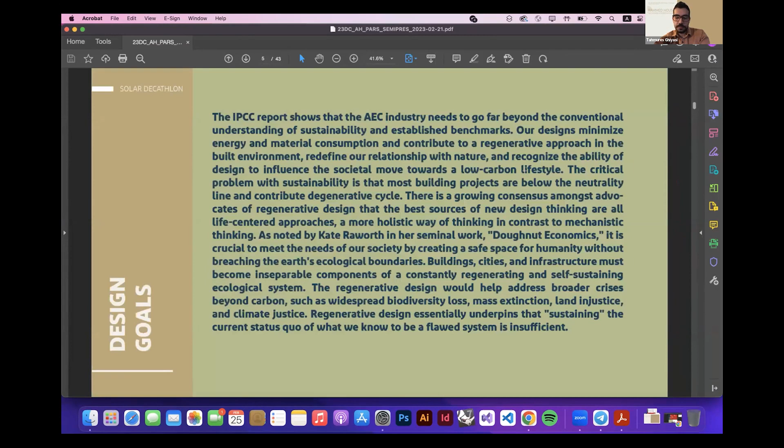The site of the project is in Sistan and Balochistan province in Iran, which I want to share something about with you. This province is the most economically depressed part of Iran, and a detached house within the framework of the governmental social housing called Maskan Mehr is being designed and constructed there. It is important to know the gas grid and electrical grid are limited, and regarding this special situation in this province in Iran, there is some kind of instability in these energy resources.

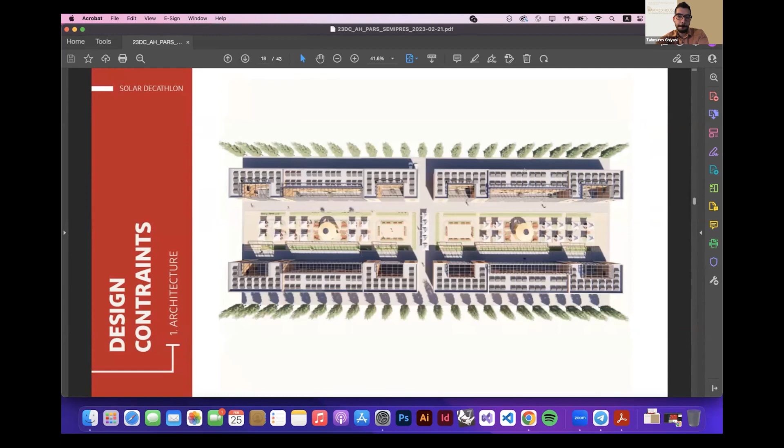Okay, I want to provide some information about the architectural aspects also. I'm sorry, can you see the plans and sections? Okay great. Well, it's important to mention that, as I previously mentioned, we designed two different types of units: one of them is about 1,400 square feet, and the second one is 2,100 square feet. We also designed some semi-private spaces between units.

With the R values, which I'm going to mention: the R value for wall is 32, for roofs is 40, the foundation 40, and also for windows is 4.

Regarding the engineering part of the project, as I mentioned before, the energy instability is a real trouble for residents of this province. In the city of Zahedan, people are using diesel generators and similar approaches to provide their energy. So after analysis and calculations, we found that we can provide the needed energy just by using photovoltaic cells on the roofs, with the main heating and cooling systems being air source heat pumps, which are reversible.

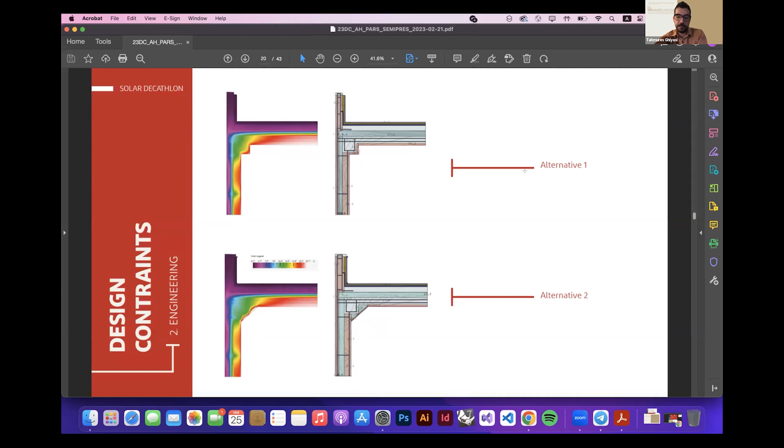You can see some details of the wall sections we designed for this particular state in Iran. The other important fact is about the marketing of the project. Our design buildings will cost 10 to 15 US dollars per square foot. That has a really important difference from the status quo of similar projects' cost, which is about 65 US dollars per square foot now.

So although the PV cells and HVAC systems are more than 30% of the total cost, the final result provides absolutely meaningful benefits for constructors and the people who are going to be residents in this new design.

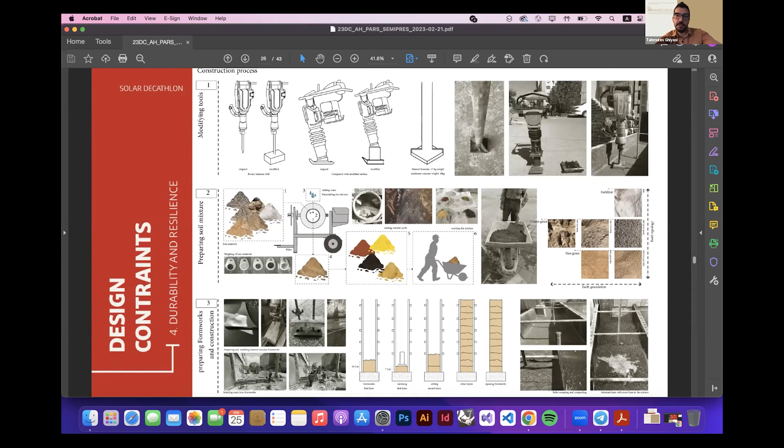About durability and resilience, we use low carbon envelopes and sustainable, local materials, which provide a really sustainable approach. There's also potential for maintenance regarding the construction details and systems we propose for the whole project. Regarding embodied carbon, we tried to reduce it as much as we could, and the final result is 0.25 tons of carbon dioxide per square foot, which was, as I previously mentioned, a meaningful result for us.

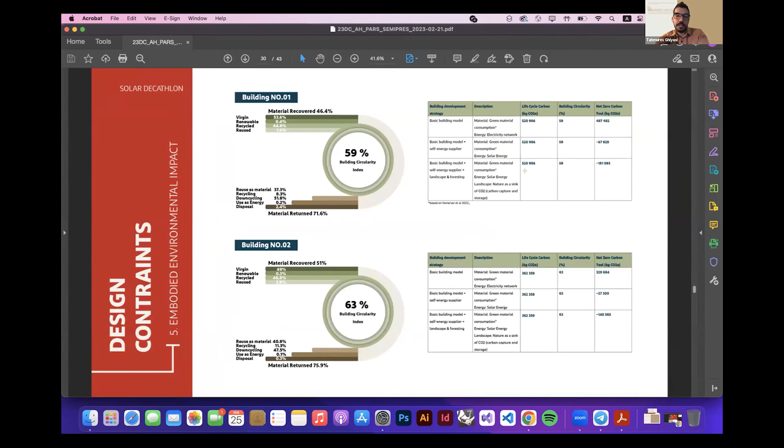Regarding the integrated performance of the whole design, I want to mention the regenerative design which we used; we wanted to consider the system as a whole, and the cost was one of the important targets for us.

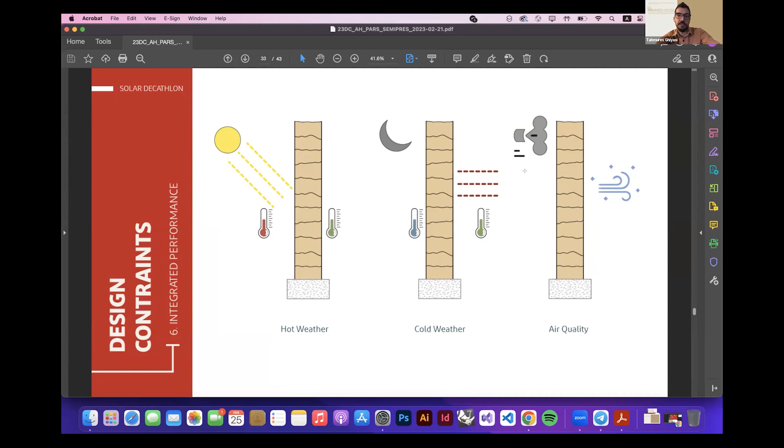Although the regenerative design and circular economy is the trend, we're considering the doughnut economy model because Iran is a developing country and there are so many troubles in social housing foundations. It's not so easy to dedicate every other aspect of the design to ecological contributions. Instead, we had to make a trade-off between these objectives, like a multi-objective optimization design space or model, if you're familiar with it.

Regarding the occupant experience, I want to mention two important points. We design an architecture to provide visual and thermal comfort, and also acoustical comfort requirements will be met by designing private and semi-private spaces, like the yards in the outdoor spaces of the project. About comfort and environmental quality, we try to design an architecture that meets the needs of the people to have a quality life with the approach of reducing costs.

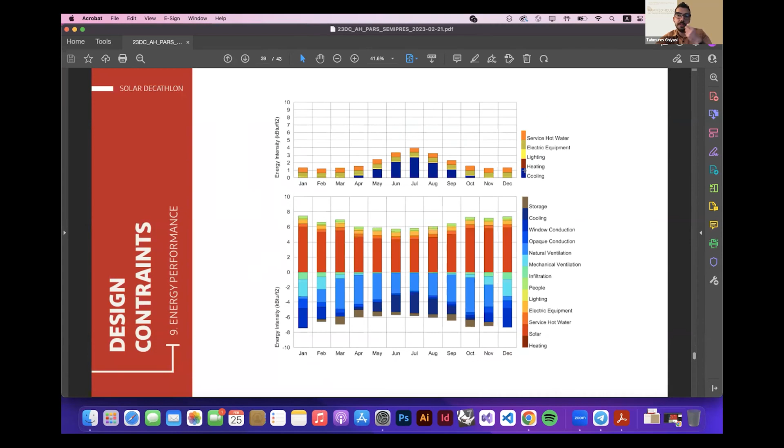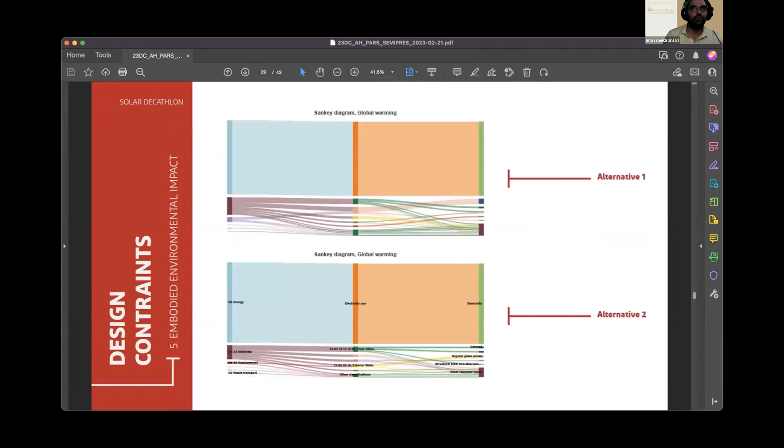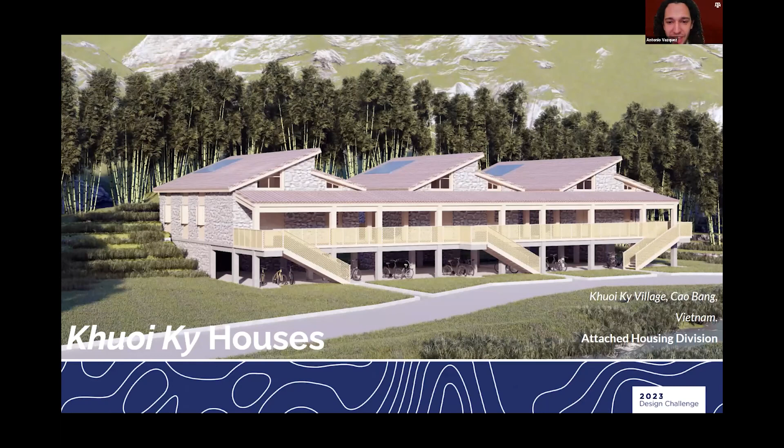We have a multidisciplinary team of architecture and construction science students from both universities and faculty advisors from both. These are our industry and design partners. I would like to highlight that we collaborated with the Ministry of Construction of Vietnam and 1+1 greater than 2, which is a Vietnamese design and construction firm.

This project is located in Khuoi Ky Village within the Cao Bang region of northern Vietnam. It consists of 3 attached houses. Our objective with this project is to propose a sensible intervention that addresses existing problems related to access to energy, living conditions, lifestyle, and the economy.

Khuoi Ky Village is inhabited by members of the Tay ethnic group, and 14 multi-generational families make up its whole population. It's located in a mountainous region, 951 feet above sea level. They have an agricultural and livestock-based economy, although due to the proximity to the Ban Gioc waterfalls, there's a growing tourist homestay market in the village.

The team had the opportunity to visit the village and survey a neighboring house. Indoor illuminance, temperature, and air velocity were measured to assess the indoor environmental quality. We found that the locals generally live in poorly ventilated spaces, dark interiors, and cold interior environments. This analysis of their existing conditions helped us define our design goals.

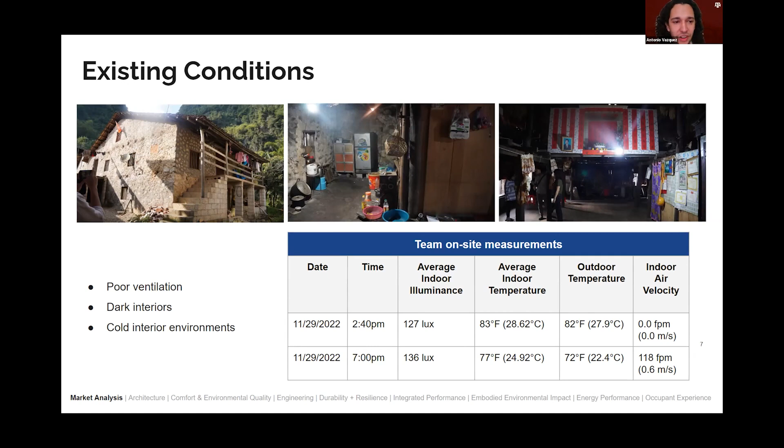Our project is in a region characterized as having a temperate climate with a dry winter season and a hot summer season at latitude 22. A more detailed analysis of the climate utilizing a local weather data file confirmed the temperate nature of the climate and its predominant cold and hot seasons.

Furthermore, a natural ventilation potential analysis was conducted. In this location, there are prevailing winds from the south during the hot season, which is when natural ventilation will be more desirable.

Using a modified comfort range for the Vietnamese people, we concluded that passive design strategies such as internal heat gains and natural ventilation could provide thermal comfort during 80% of the year and only require supplementary heating and cooling during 20% of the year, ensuring the lowest possible reliance on energy consumption.

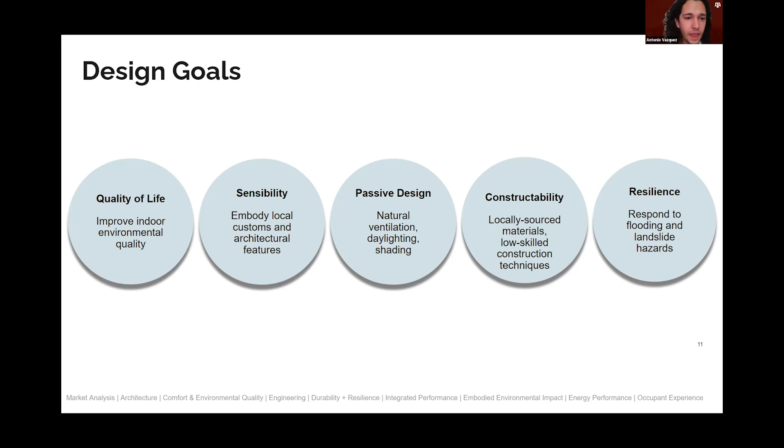Our design addresses 5 goals: quality of life by improving indoor environmental quality; sensibility, as the project respects and embodies local customs and architectural features; passive design strategies such as natural ventilation, daylighting, and shading to ensure comfort and low energy consumption; constructability, studied to prioritize locally sourced materials and low-skilled construction techniques; and finally, resilience towards flooding and landslide hazards.

The attached houses are joined by an outdoor veranda oriented towards the southeast, in part to respond to local building customs, but also to provide access to the prevailing summer winds and views towards the landscape. The buildings were separated to facilitate natural ventilation and access to daylighting, and harvest drying areas are provided in the gaps between the buildings.

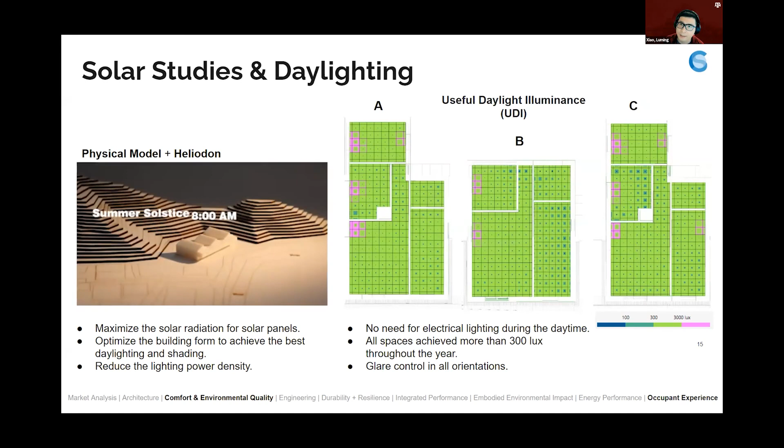For the solar studies, we maximize the solar access for photovoltaics and daylighting, and optimize the shading design. The right diagram shows we have very good daylight performance, with every space exceeding 300 lux at least during the daytime, and we control the glare effect very well in all directions.

For the envelope, we were using local materials with good performance and easy access in that region. We selected a continuous insulation system with low carbon and low-skill construction techniques that local people can build easily.

The selection of energy-efficient building materials was based on reduction of embodied carbon by using local materials to reduce transportation-related emissions. At the same time, the use of local biogenic materials can store carbon to offset operational carbon emissions.

To address the flooding and landslide hazards, we adopted local bamboo for protecting buildings, which can stabilize the soil at the back of our site. At the same time, we elevated the building to avoid floods. We also designed a rainwater harvesting system to collect and store water for irrigation and domestic use.

We used EUI and HERS to evaluate the energy performance. Before solar panels, we achieved 4.3 to 4.5 EUI for each unit, and with solar panels we got 0. In HERS, we got 34 to 36 without solar panels and 4 to 8 with solar panels. Our design exceeds the AIA 2030 challenge requirements and is more efficient than the RESNET reference home.

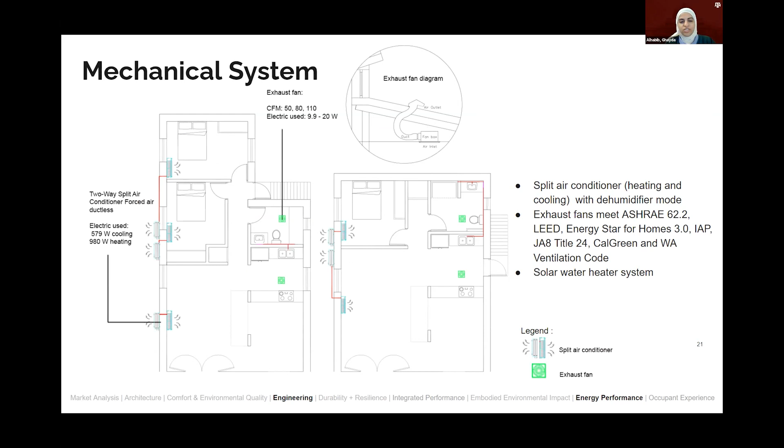To sum up, our project improves existing living conditions for the occupants, reduces energy consumption through the use of passive strategies, incorporates local architectural features and lifestyles, uses locally sourced material and low-skill construction technique, responds to natural hazards, and proposes an adaptable and affordable housing prototype for future development in that region. Thank you.

Great job, guys. Yeah, really well done. And with that, we'll turn it over to Alex and Steve.

Good morning, guys, that was an excellent job. I do have a question for you. If you go back to your overhead picture of the site, I think it was like the second or third slide that you had there. Currently it looks like the site is wooded.

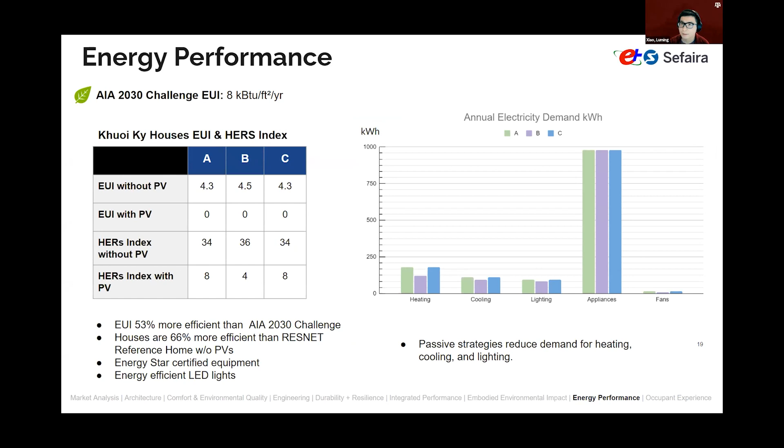You mean the utility fee? No, the sewer. I saw that there, the toilets and all that. Is it going to a city or local municipality treatment, or is it treated on site?

Our project is located in a rural area, so we have not a very good civic sewer system. Our idea is to keep the contour of the existing condition. On the back of the site we have a mountain, and we're trying not to change too much elevation on our site. Then we can still navigate the rainwater to the lowest point, to the river in front of our site. This is a consideration, but if the local area has a good civic drainage system, we will connect to that as well. We're also considering using a septic tank, basically.

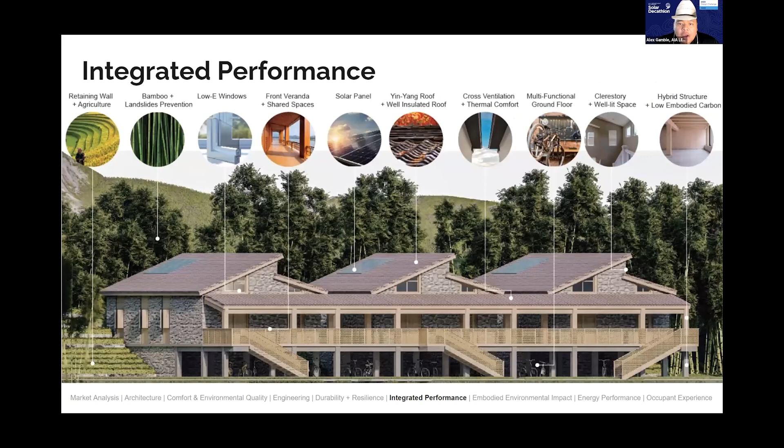Okay, I didn't see anything that reflected that. I understand the stormwater, but again, black water, right? That's got to be important here. Second question: I know it said it was an agricultural and livestock economy. Other than the harvest drying area, how does this design take into account the people's use and reliance on livestock? How does the design address that, and I don't know what kind of livestock they're raising or maintaining, but how does it address that? And going back to that, where there are animals, there's waste. How does that happen?

Part of our design embodies local architectural features. Here, all the houses are elevated, and their first floor functions as storage space, where they keep livestock on the first level. That's also part of elevating the houses, so that first floor seems to be very important to them for that use.

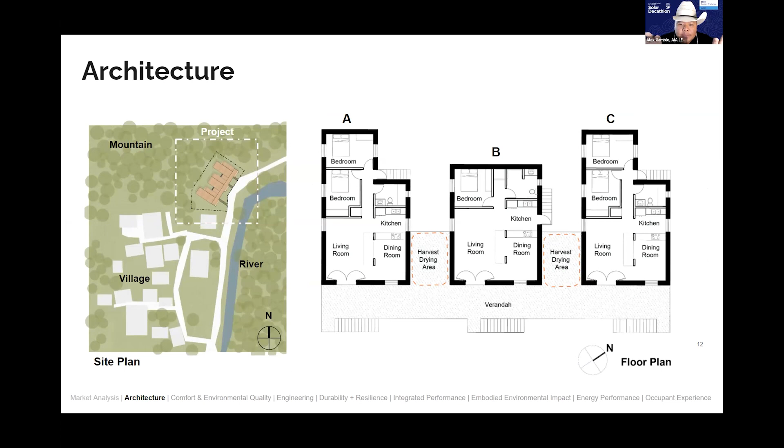Okay, yeah, that makes sense. In one of the sections I saw it looked like there was bicycle storage or things like that happening. Yes, on the ground floor, to avoid the flooding issue, we elevate the main living space to the second floor. At the same time, the ground floor becomes multifunctional for future use, decided by the future occupant, so it can be storage for agricultural products or a parking space.

Okay, one last question. Those little channels there, are those the stormwater channels?

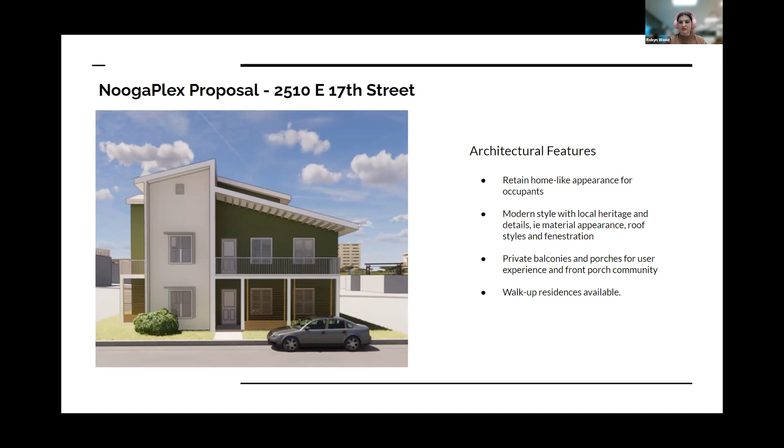The building from a glance looks like a single-family home. Each unit features its own porch to tie in the idea of a front porch community, while a modern double-shed roof combines with a traditional gable to blend in with the housing styles in the area.

Considering our target market is families with children, 2-bedroom units are a key part of the space planning and design. NoogaPlex has a 2-bedroom unit option and a 1-bedroom/studio unit to serve the majority of CNE clients, which fall in the range of 18 to 25 years old.

Chattanooga is located in the International Energy Conservation Code Climate Zone 4A. We have a warm, humid climate with our lowest temperatures dropping 0 to 5 degrees Fahrenheit. Our average hottest temperature of the year is around 89 degrees.

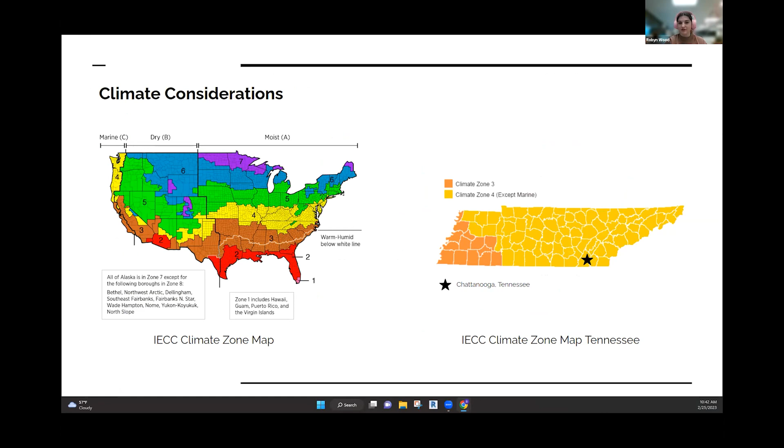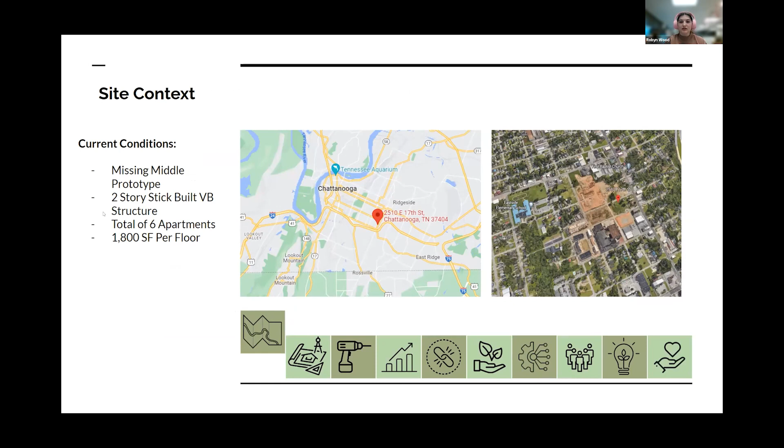Chattanooga has high humidity levels where our cloud coverage varies largely based on season. In terms of solar energy, our brightest months are from April to September, with our darker period lasting from November to February. Situated on the southeast side of Chattanooga, adjacent to I-24, the site lies facing northeast.

Chattanooga has been a rapidly growing city in recent years, which has led to the housing market rapidly increasing alongside it. Our job market lies largely in the technology, healthcare, and education industries. Our site is located near many amenities, including schools, hospitals, restaurants, and more, which maximizes access to public transportation and the walkability of the site.

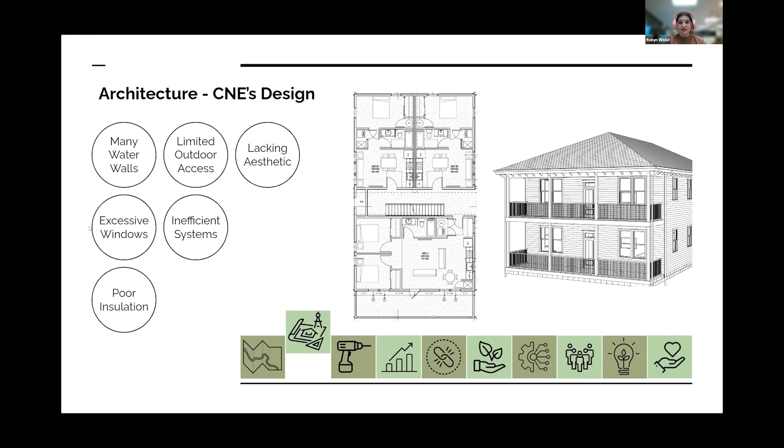Breaking down CNE's current design, we can analyze multiple design issues that can be altered to improve the building's energy efficiency. This entails poor placement of water walls, limited outdoor access for occupants, basic architectural aesthetic, excessive use of windows, inefficient systems, and poor insulation.

The architectural response for the new building retains the overall form by sharing a single roof with a breezeway and stairway through the center. The roof design has been changed from a hip roof to a mixture of attached sheds and gable, which provides more visual interest at the request of CNE, melding traditional lines with modern design. The building makes use of natural site conditions, which affect window placement, fenestration, and overall aesthetics of the building.

CNE's design was rather basic from an engineering standpoint. Though the construction was simple, it failed to adequately account for air leakage. It also sacrificed a lot of space to an unused attic and had complicated HVAC and plumbing networks.

To reduce air leakage and improve R values, we utilized expansion foam insulation. We simplified the plumbing and HVAC systems by changing to a ductless mini split and running most of the refrigerant lines and all of the plumbing through a central wall.

To take advantage of the attic space, we added an extra room on one side and hid the water and heating ventilation equipment in an easily accessible mechanical room on the other. Having this equipment separated from the resident means that it is quieter and can be accessed for maintenance without having to enter the tenant's home.

Running the ERV through the attic also allowed us to ventilate the attic and cut out expensive ducting runs.

Overall, in Chattanooga, a total of 43% of the population is cost burdened, with a median rent of $850 for renters and an annual household income below $40,000. The proposed design for the NoogaPlex can offer alternative housing options for those who pay more than 30% of their monthly income on housing.

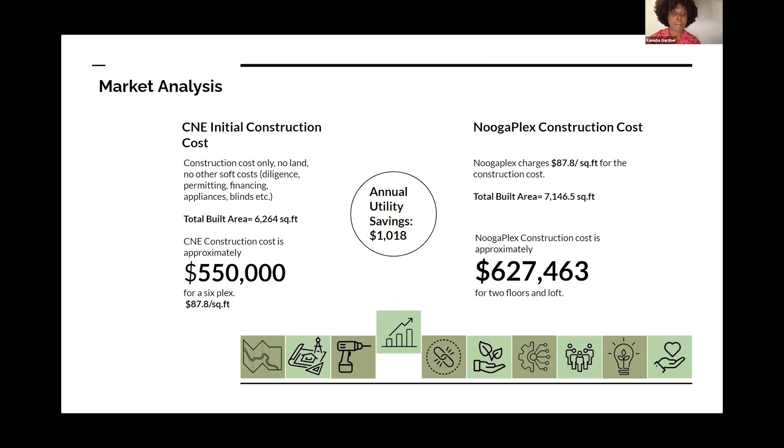This is counteracted through overall utility savings, which equals $1,018 annually. A large part of our plan focused on ensuring a long lifespan and low maintenance requirements. For the structure, this meant using materials that are strong, environmentally resistant, and eco-friendly, such as pulverized fuel ash concrete for the foundation and reclaimed wood for the framing.

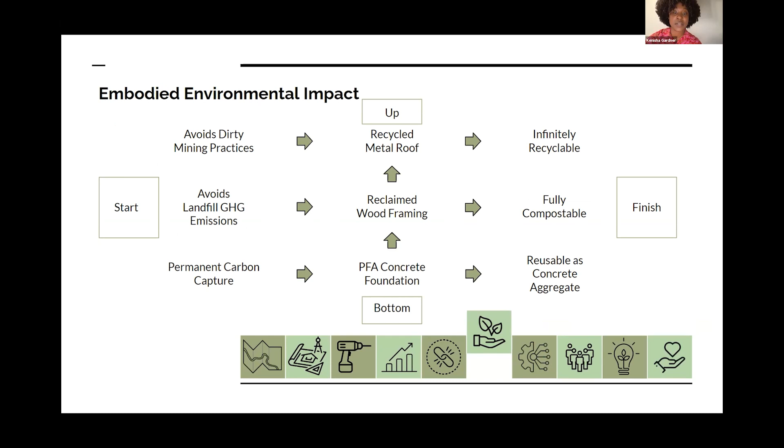For the appliances, it meant ensuring ease of maintenance and a minimum 20-year lifespan where possible. Our plan is to use a zero carbon structural design method by reducing the environmental impact of upfront carbon emissions from materials. Building materials are proportionally categorized as being recycled, reused, and diverted from landfill during construction and at the end of the building's life cycle wherever possible.

All of the electrical and HVAC systems were chosen to complement and benefit each other. To reduce electricity demand, we incorporated energy recuperation strategies such as an ERV and a waste heat concentrator, which captures heat from the AC system to preheat water for the tankless water heaters. Additionally, we chose efficient appliances and utilized passive cooling strategies wherever possible, which improved overall air quality and reduced the number of air changes per hour required to maintain a healthy environment.

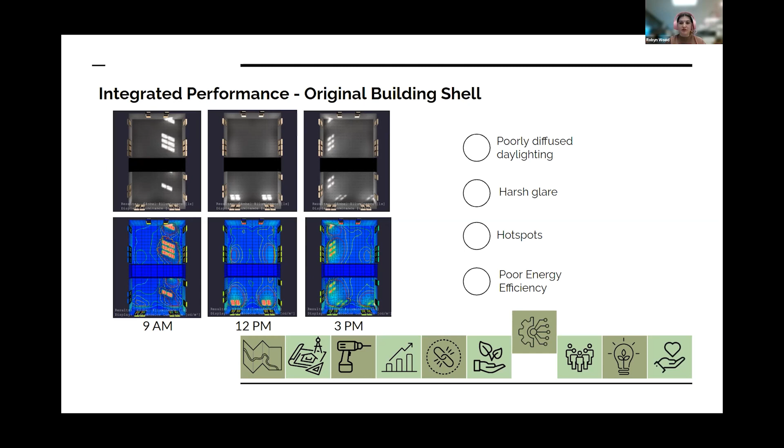The original plan's window placement resulted in a space that gained a lot of unwanted heat through the east and west sides of the building, increasing the amount of energy that would be spent to lower the interior thermal environment. These windows also resulted in hot spots that brought about harsh glares, and the overall interior environment had poorly diffused daylighting. NoogaPlex's proposed design takes advantage of the north and south facing windows to create a symbiotic relationship between the thermal environment and the proposed heating and cooling systems. This integrated approach has resulted in softer, well-diffused daylight within the space and energy savings in the long run.

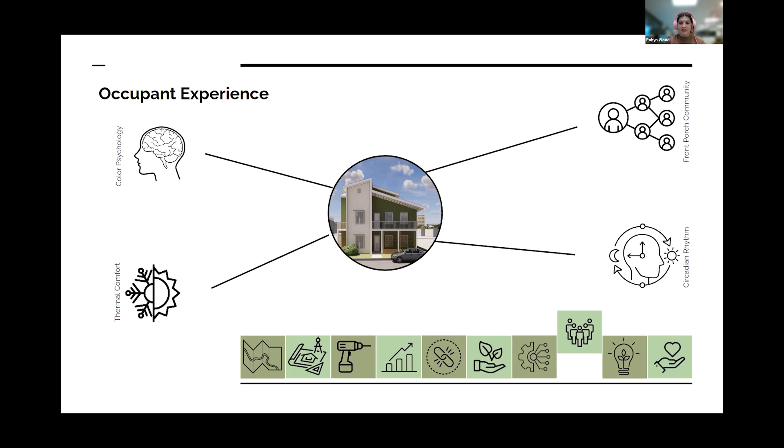The NoogaPlex is designed with user experience in mind, focusing on integrating design solutions to enhance occupant experience through color psychology, thermal comfort, circadian rhythm regularity, and community, achieving a high level of functionality. With the addition of specifying sustainable products and site-specific design, the building envelope positively affects the health and well-being of both the interior and exterior environment.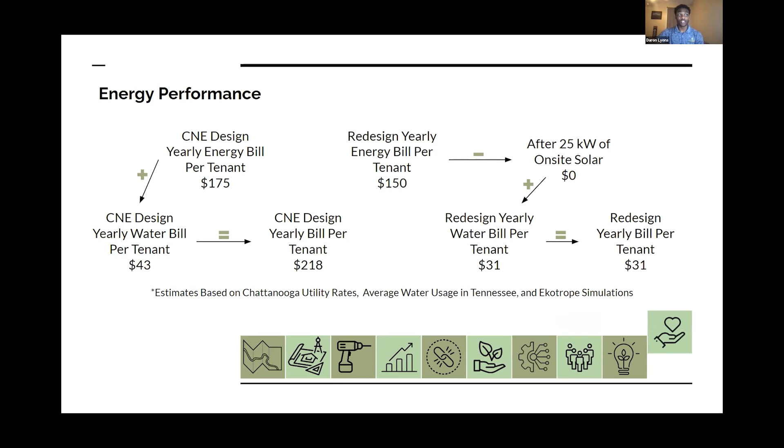Thanks to the various efficiency solutions used in this project, we were able to reduce the energy bill by 15%, which significantly adds to CNE's ability to provide affordable housing. This energy reduction meant that we were able to cover the remaining energy needs with a single large solar array, which could be easily added to the large southeast facing roof either during construction or as funds allow, without sacrificing any of the original design characteristics.

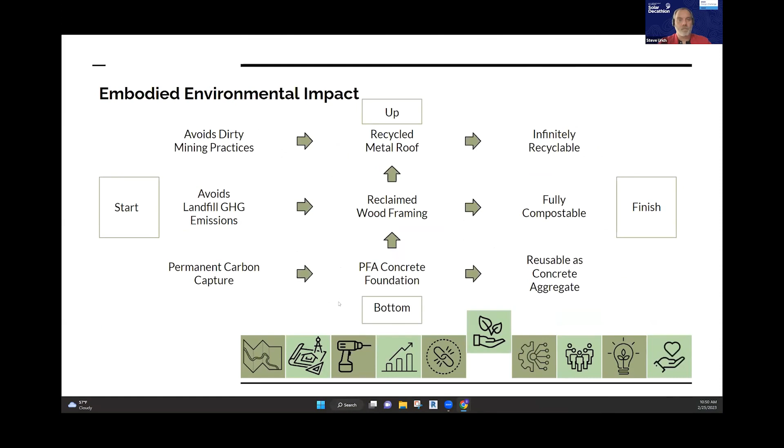Sort of, I guess, I don't know. I'm a little worried about it. I have kids, I love my kids dearly, but one of us is not coming out of a 400 square foot apartment if we're living together for many years. So yeah, that's just my take on that.

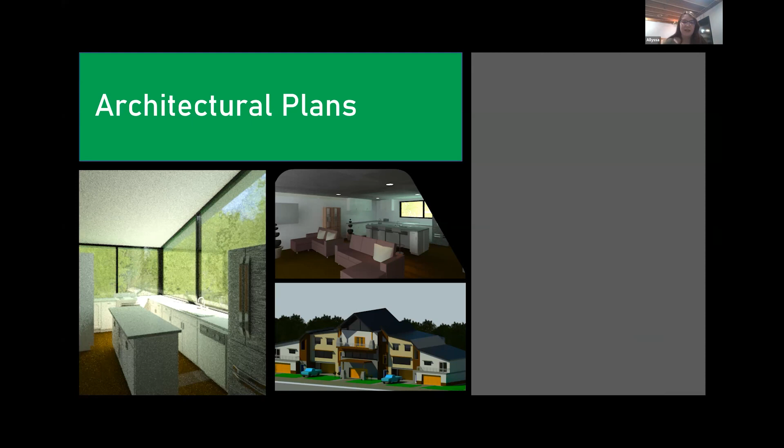So these are our floor plans. Our main goal when doing the design was that we wanted to keep everything up to date, and we wanted people to have their own space.

Each unit includes a one-car garage, and if there's another car or more, there is parking. There's also going to be an additional parking lot with a canopy over it, so the snow doesn't build up and you don't have to clean your car off every day in the winter.

Each unit also includes an in-house washer and dryer, so you don't have to go to a laundromat. They have full-size kitchens, two bedrooms or more, and each one includes a balcony, full-size closets, and up-to-date appliances.

The building is staggered to give a sense of privacy because the two outside units have the balcony on the front, the ones in the middle wings are in the back, and the balcony in the center is in the front. The staggering makes it so that you have more privacy, which was also one of our goals since you're living in close quarters.

Now Jeremy's going to talk about envelope and detailing. The materials we chose for the envelope are all sourced within 200 miles of the project site to minimize carbon footprint, and the design was focused on ease of construction, reducing construction costs, and the quality of the living experience for the inhabitants.

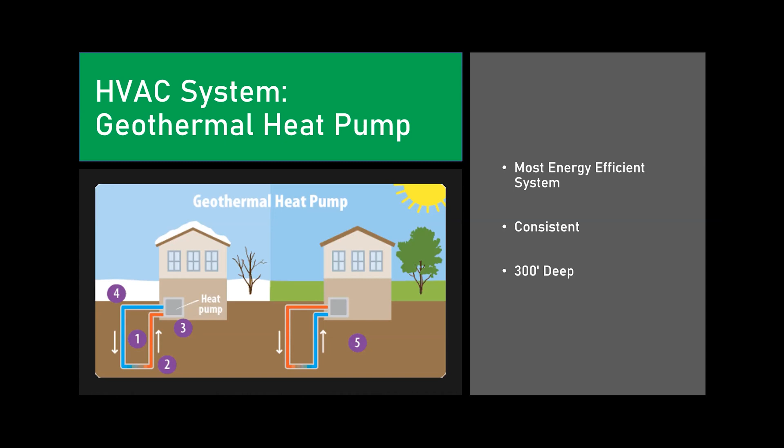Our HVAC unit of choice is the Trane Axiom High Efficiency ground loop heat pump. Sizes range from 2.475 to 3.625 tons, depending on the occupancy of each unit, which will determine the size of unit we choose for each.

For plumbing, everything is going to be high efficiency, with low water usage and consumption. We met our goals for low water usage through low flow fixtures, and we also chose to go with a rainwater harvesting system, with each individual building having its own system.

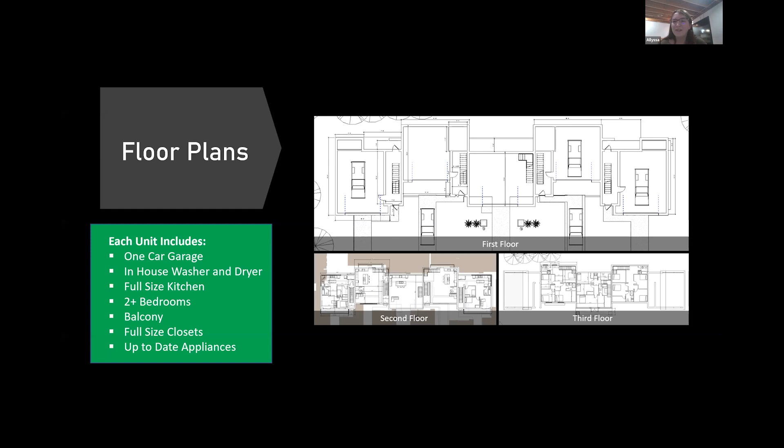If you can go back to the floor plan for me. It looks like each unit has its own stairway down to the garage. Yes, for access to their vehicles. And that's okay with fire code? Yes, because when researching into this, each unit can have its own stairwell in its building, as long as you meet the fire system regulations. So make sure you have sprinkler systems in the stairwell, make sure you have the horn strobes, and it had to be a certain area and a certain amount of stairs. But I don't remember it off the top of my head.

Okay, that's fine. It was more just kind of an egress question, making sure you could get people out the windows, and that it was fine. So yeah, that's fine. And then the systems, I know we went over that real quick.

You were doing one of the ground source heat pumps per building or one per unit? Yeah, so I believe we sized one per building. Okay, and that size is dependent upon the occupancy of each building. Yeah. Okay, I just wasn't sure. Yep, sorry about that. No, that's okay, that's why we're here, to ask questions.

And then did you guys consider putting the photovoltaics on the covered parking? Is that where it is, or is it on the roof of the buildings? Yeah, so on that covered parking, it's going to be filled with the photovoltaics. And anything excess that we couldn't make up is going to be ground mounted. Okay.

And Alex, if you don't mind, one last question. What made you pick that location on your site for the buildings? So that is a really good question. There's a mountain range that those face, and the orientation on that east-west axis allows us to maximize solar gains in the winter as well as minimize in the summer.

Perfect. So we are doing attached senior housing.

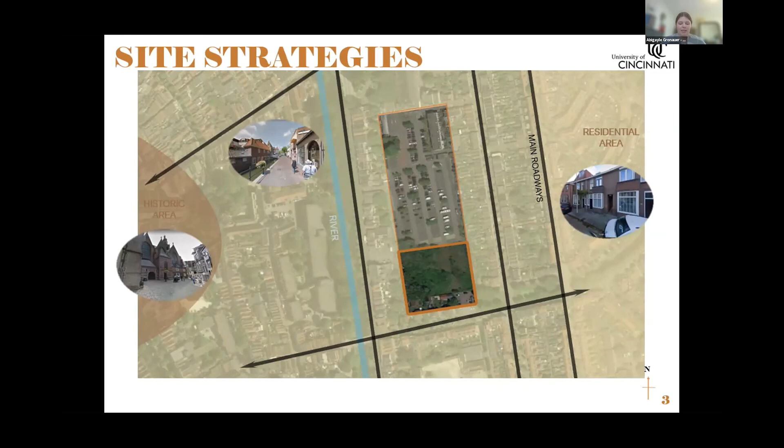The climate in Gouda is temperate and can be classified as a 4C climate zone. It has cool, wet winters and mild, relatively dry summers, with highs in the 70s and lows in the 30s, and moderate rainfall throughout the year.

Our site specifically experiences prevailing winds from the southwest corner of the site, with an average wind speed of 11 miles per hour. Additionally, our site experiences southern lighting, which is not obscured by the surrounding buildings.

The length of the day in Gouda varies widely throughout the year, with an average of 12.27 hours of sunlight a day. This shows the proposed net zero corridor with our attached housing development located at the southernmost portion of the site.

Our portion of the site has 3 identical buildings, each with 4 units.

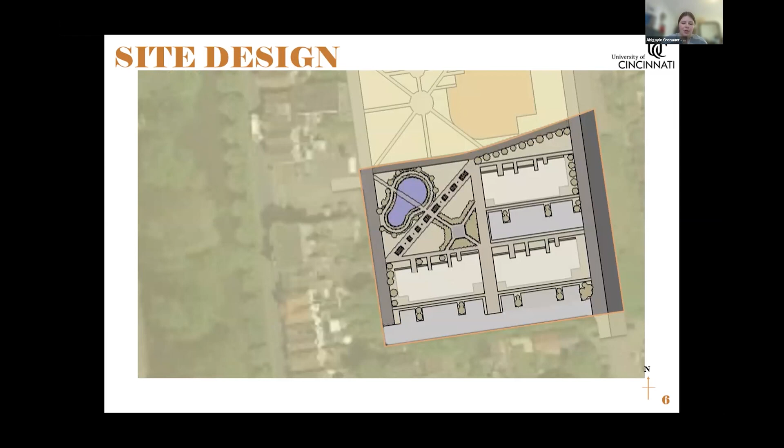The layout and design of our site was largely influenced by the weather patterns and community of Gouda, and it led us to have 3 main goals when creating our design.

Our first goal was to create accessible housing with convertible spaces where residents would be able to age in place. This meant that our site and buildings had to be navigable at all ages.

To accomplish this, we ensured that there were no steps throughout our site, so it was easy to navigate and ADA accessible. Each unit also features convertible spaces to aid with aging in place.

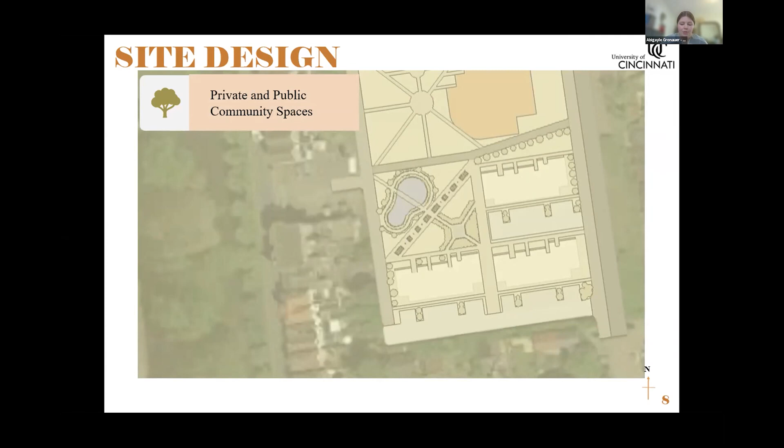Second, we wanted to create public and private spaces for our residents and surrounding communities to enjoy. To create these public spaces, we started by creating a walking path that runs through our entire site and leads to places like our vegetable and wind garden and rose garden. Each unit also has private patios and balconies for residents to enjoy.

Our third design goal was that we wanted to create a sustainable environment for our residents. To do this, we first looked at ways to reduce maintenance within each unit and around the site.

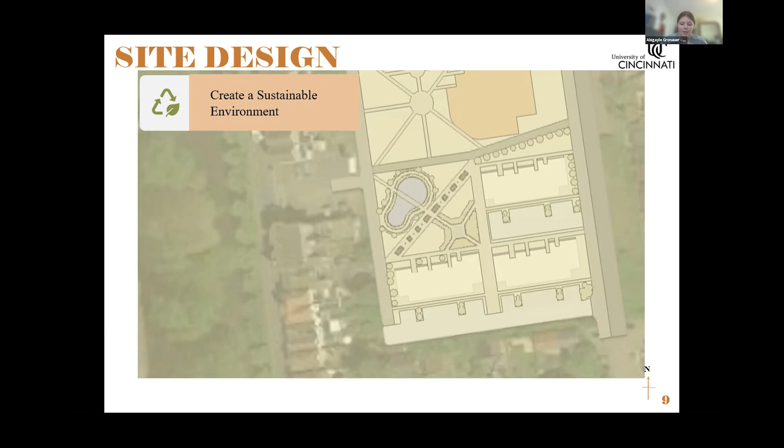We opted for durable materials that wouldn't wear over time. We also wanted to mitigate variable expenses our residents might have, so we provided 2 energy harvesting systems in the form of solar panels and wind turbines, which in theory should produce energy opposite to each other.

Now for our architectural design. As mentioned earlier, we have 3 buildings on our site, each including 2 3-bedroom units and 2 2-bedroom units.

Since we are focusing on aging in place, our floor plans have all essential functions on the first floor, with additional bedrooms, bathrooms, and balconies on the second floor.

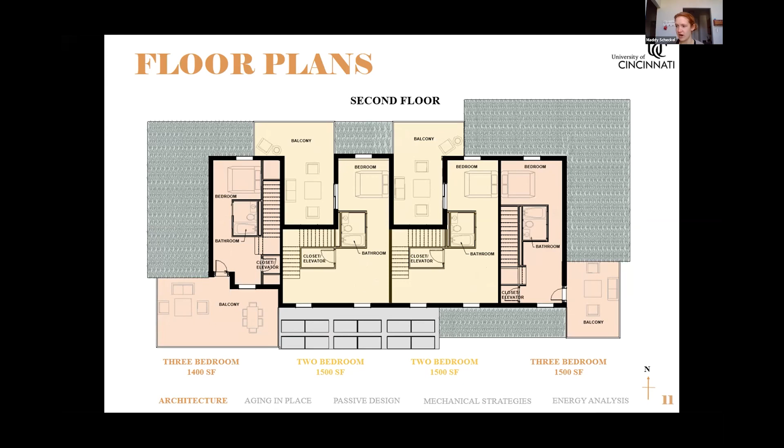The areas in green reflect our green roof, and the areas in gray are where our solar panel will go.

In the aging in place experience for one of our 3-bedroom units, it is typical for all of our units. In this scenario, we are looking at a couple who has just retired and recently moved into this unit.

The residents are at a more physically capable stage in their lives, where they share a bedroom and use 2 bedrooms downstairs as an office or den.

In phase 2, they can move the main bedroom downstairs, assuming one resident can no longer use the steps, and they convert the upstairs space into a guest bedroom for family visiting.

Finally, in phase 3, each resident has their bedroom on the main floor, assuming neither of them can physically use the stairs anymore. The second floor can remain as a guest bedroom, or the residents can use that space for an at-home caretaker. The caretaker has the space to add a kitchenette.

If the residents opt out of having an in-home caretaker, they have the option to convert the closet into an elevator.

Here is a view of a typical furniture layout throughout the main living space of our units.

Overall, our design was heavily influenced by passive design strategies, starting with our 6 wind turbines located on the northwest end of our site. We have 2 wind turbines dedicated to powering each building. And then we also have a green roof.

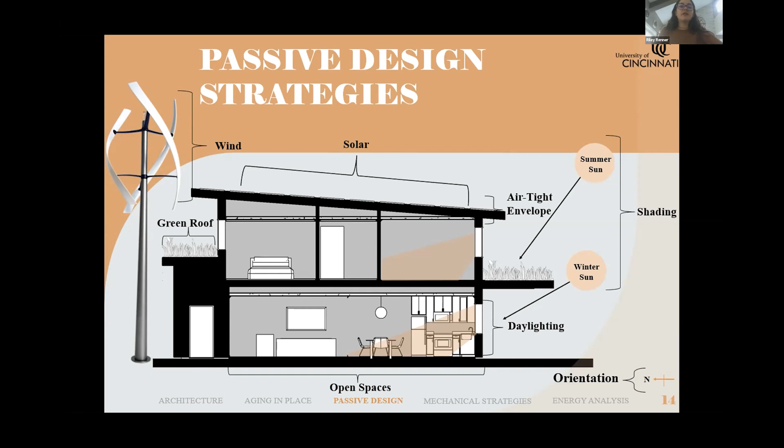For our mechanical design, we have ground source heat pumps located on the northeast corner of our building that serves all of our units. This ground source heat pump pumps refrigerant to each of our heat pumps that are located in the main areas of each unit. And then we also have dedicated outside air systems in the first floor of the bedrooms.

We wanted to put it there so that when our CO2 sensors go off, outside air is directly getting to our sleeping occupants, and also helps with exhausting our bathrooms. We have to have that for our airtight envelope as well.

And then lastly, our ground source heat pump also has a heat exchanger with our domestic hot water tank to preliminary heat our domestic hot water before it uses electricity to heat our domestic hot water.

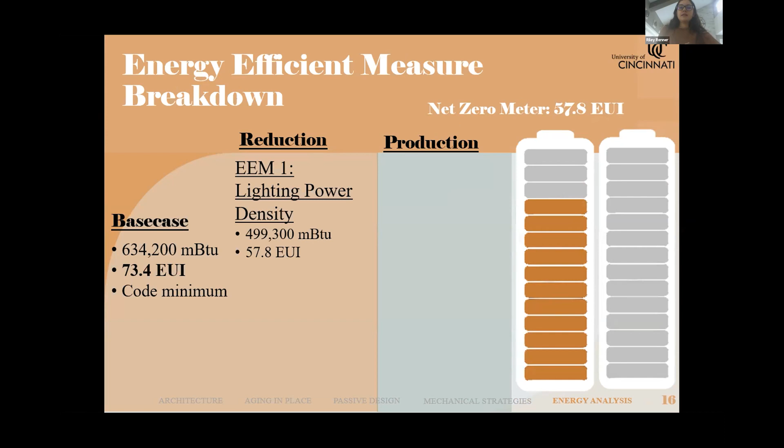This brings us to our energy efficient measure breakdowns. We started our energy model with a base case building that is just ASHRAE code minimum, which is a 73.4 EUI. In an effort to reduce that, we looked at our lighting power density, reducing it to a 57.8 EUI. Then for our second measure, we had an equipment power density reduction, which brought us all the way down to a 32.4 EUI.

We looked at other measures, but these two were the most significant for us. This brings us to our production. We have PV on our roof, which generates about 25.4 EUI of electricity per building. This brings our building down to a 7 EUI overall.

And then we added our wind. We have 2 turbines dedicated per building to generate electricity. They generate around 6.1 EUI per building, bringing us to a 0.9 EUI overall. Lastly, we have a shared bike PV path, generating around 4.5 EUI of electricity per building, bringing us to an overall EUI of negative 3.5, making us net positive, meaning we generate more electricity than we consume.

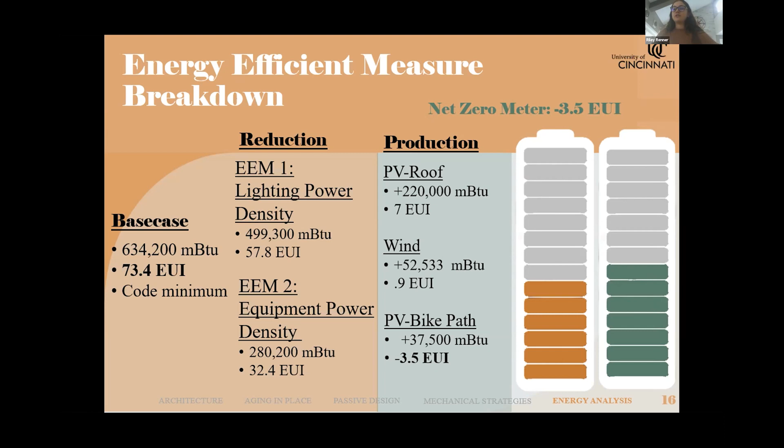And that is all for our little brief 8-minute presentation on our project. We hope you enjoyed it.

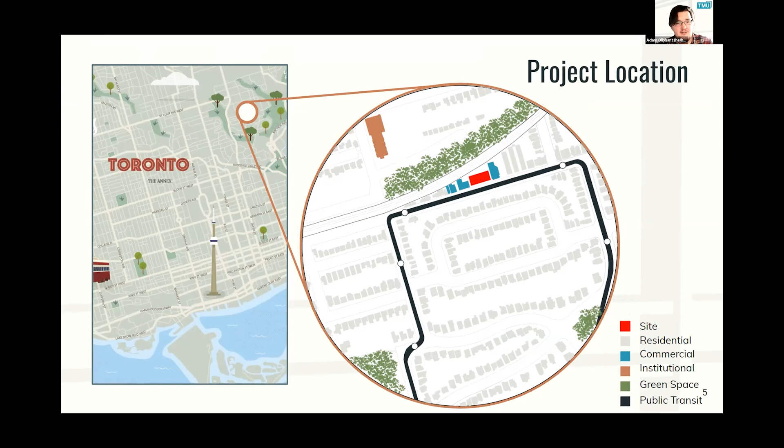To start, we selected an undesirable site in a desirable, low-density residential neighborhood in Toronto. The site is currently an underutilized parking lot surrounded by single and semi-detached homes and neighboring low-rise mixed-use buildings. The scheme we developed is a 3-story, 12-unit condominium, totaling 19,500 square feet of GFA, comprised of 12 units with 1,100 square foot interior footprints. Toronto is listed as Zone 6 under the ASHRAE Climate Index, meaning it is primarily a heating climate, with nearly 3,700 heating degree days and only around 400 cooling degree days.

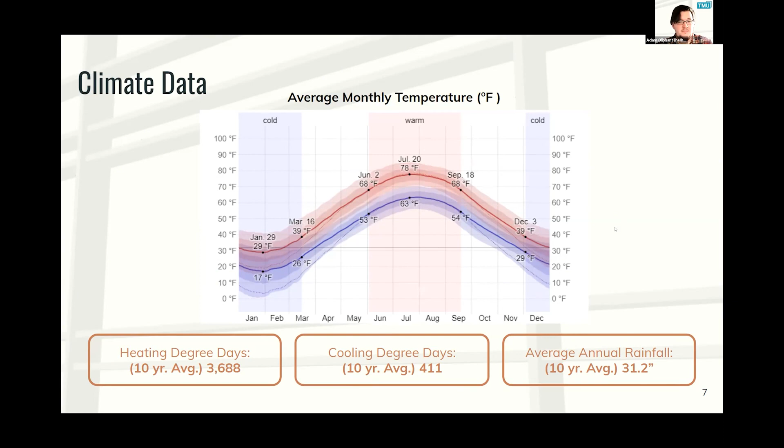For the design, the remainder of our presentation follows the competition structure guidelines.

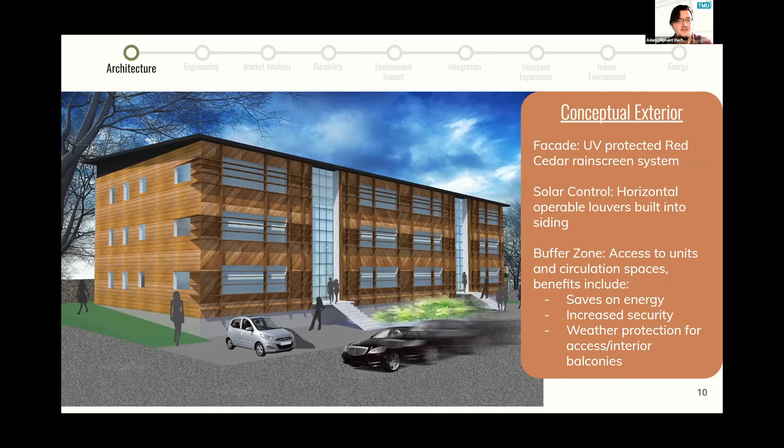This view also shows the shared access through the glass-walled buffer zone, a circulation space that provides both security and weather protection.

Each unit has an identical layout, configured with either 2 bedrooms plus a den/office, or 3 bedrooms on the end units. Meanwhile, the circulation spaces are minimally conditioned to reduce the overall energy consumption.

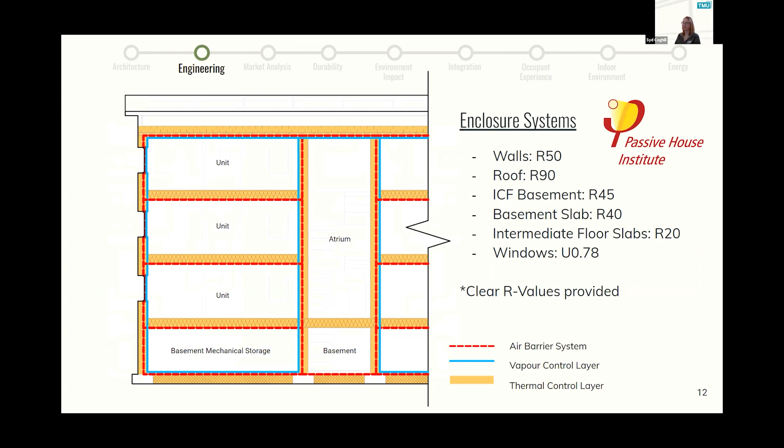Within the building enclosure, passive house quality assemblies were identified as a critical deliverable. These are provided through the highly insulated and airtight assemblies depicted here, separating the exterior environment from the interior for greater thermal control. Each unit and the buffer zone also maintain their own air barrier system to eliminate unwanted air movement between these spaces.

Within the exterior wall assemblies, the primary air barrier is provided through taped and sealed plywood sheathing. A secondary air barrier system is provided by the high-performance Solitex Mento weather-resistant barrier. It is expected that these assemblies will achieve air tightness of 0.6 ACH.

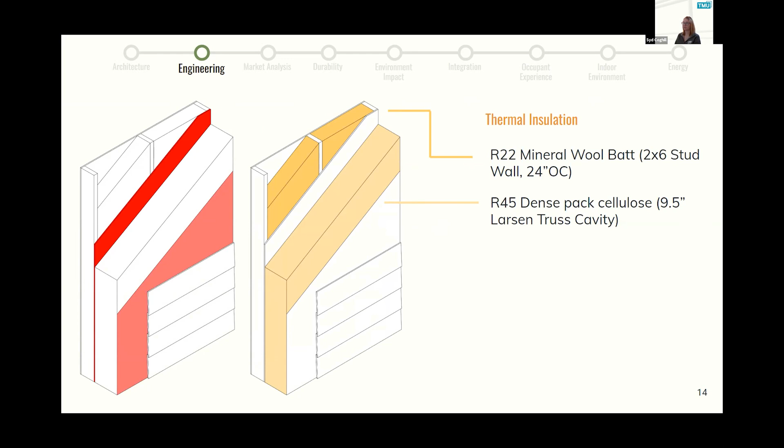Insulation is provided in 2 layers: mineral wool batt within the stud cavity, and dense pack insulation within the outboard Larsen truss cavity. Advanced framing techniques have been used to reduce thermal bridging of framing elements. The highly insulated envelope achieves an effective R value of 50 when accounting for these framing elements. Vapor control is provided through a vapor control primer on the interior drywall, while exterior water is shed through a rain screen system.

The project's active systems were selected based on their high efficiency to work within the energy budget provided by the PV array. A ground source heat pump system provides the space conditioning, while a hybrid electric heat pump is used for water heating. Energy usage is further reduced with an ERV, Energy Star rated appliances, and LED lighting systems. Water usage reductions are provided through WaterSense fixtures and supplemented by rainwater harvested and stored in cisterns on site.

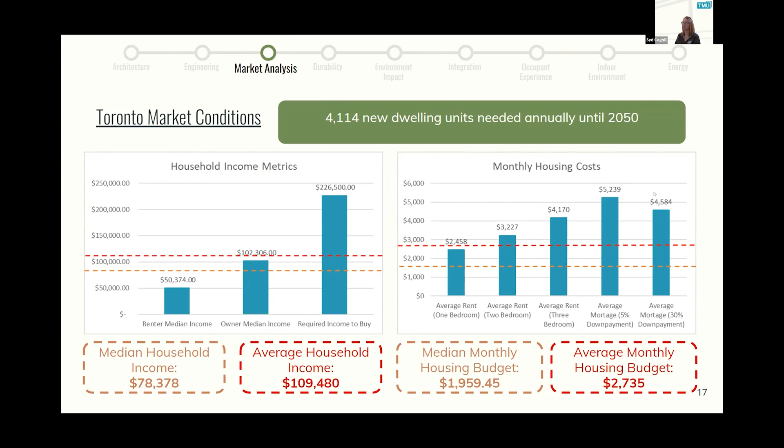In developing the preliminary costing model for Summerhill Place, the construction cost is estimated at $300 per square foot. Factoring in other expenses, it's estimated units could be sold for $825,000, 35% below the average price for a Toronto condo and close to an average household's budget. With Summerhill's utilities being 89% below average, the net savings over 30 years are estimated at over $580,000, making these units a better long-term financial decision.

The combination of active and passive strategies used provide 55 to 75% energy savings when compared with more standard systems. The consistent ambient ground temperature utilized by the ground source heat pump and reduced heat losses through the enclosure, as well as the fairly consistent power provided by the solar array, add to the building's emergency preparedness, while the long lifespan of these systems reduce failure frequency.

The project has low embodied carbon due to its predominantly wood structural, mineral wool, loose fill, and dense packed cellulose insulations, as well as the natural wood products used in the siding, floors, and trims. From a preliminary evaluation, the project's embodied carbon is 50 to 60% lower than an Ontario equivalent. With zero operational carbon emissions, the project is 100% lower than an Ontario equivalent in this area.

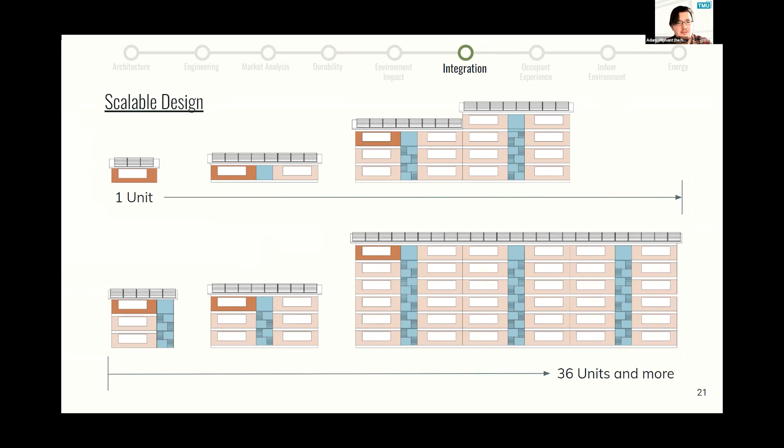Continuing from environmental impact, we endeavored to set an example by creating a highly replicable and democratic building. Geometric simplicity of the units allows them to be scaled and configured to suit many potential sites, though it is vertically limited to about 6 stories due to the wood construction.

For the environment indoors, HVAC and lighting use integrated monitoring systems and autonomous scheduling. For example, each unit has entirely separate ventilation systems. In combination with CO2 sensing in the air, ERVs can run when needed to optimize energy use, fresh air, and thermal comfort. Additional consideration for air quality includes using low or no VOC interior finishes only and HEPA filters in fresh air supply systems.

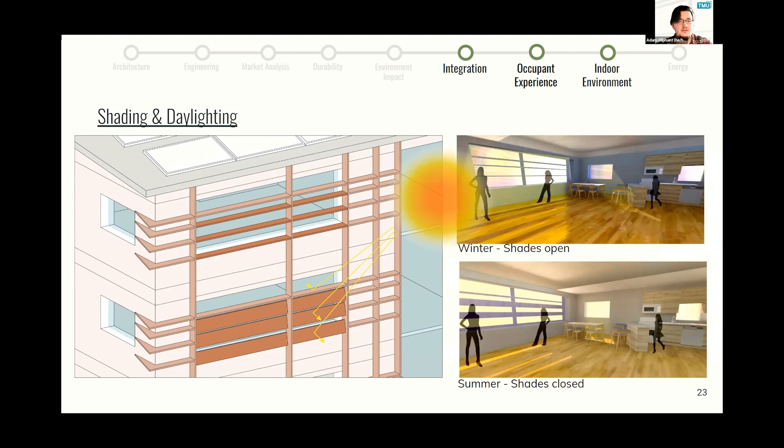Sunlight entering each unit is controlled using exterior horizontal shading and occupant-controlled operable louvers. Additionally, a light shelf is used to diffuse light deeper into each unit.

The resulting preliminary energy model, generated using EnergyPlus, is estimated at 30,000 kilo BTUs of energy annually per unit, which represents a 40% reduction over an average Ontario low-rise condo unit. Additionally, the 116-panel PV array is estimated using Helioscope to produce a net of 106.2 megawatt hours annually, meeting and potentially exceeding the total energy demand of the building.

That concludes our presentation. Thank you for your time.

Thank you. We'll open it up for questions. All right. Good job, guys. This was really good.

Is there a plan at all for noise attenuation from that rail corridor that's right behind the building? Yes, there is. We had included provisions for an earthen berm across the rear of the site, which we would then plant with coniferous shrubs and small trees, as well as wild vegetation. Additionally, I live quite close to this rail corridor, and it gets very infrequent traffic.

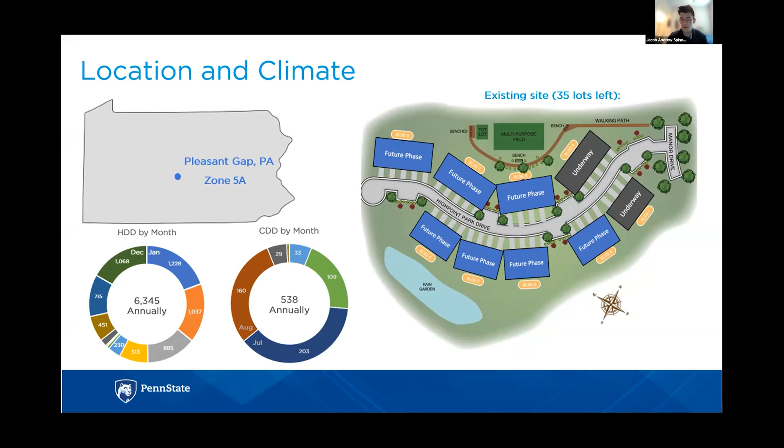We will focus on Pleasant Gap, shown in blue, as a case study, since this is where the existing Redfield townhomes are being built.

Currently, Berks Homes and S&A Homes are the only two production townhome builders in the area. We plan on having Solar Chase townhomes become a trendsetter for new townhomes for both of these companies and potentially new ones as well.

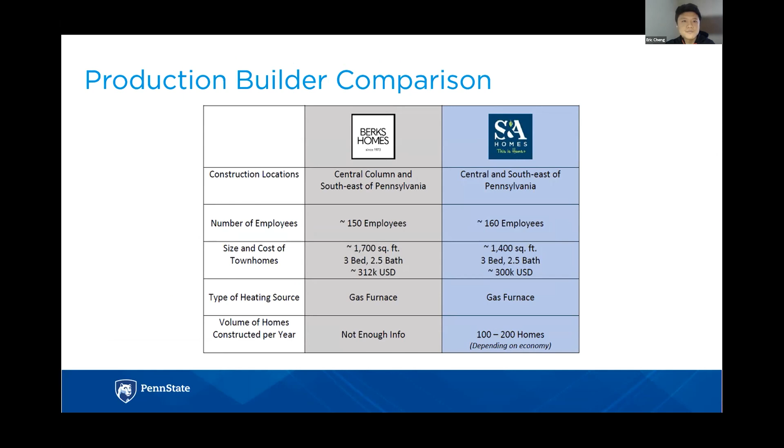So why redesign a proven product? Let's take a look at the average new construction on these lots versus the Solar Chase units. Although it is a slightly higher initial investment, the combined monthly cost of ownership is lower for a Solar Chase home as it achieves net zero performance. These units also provide the occupant with healthier air and greater comfort.

Scalability is key and can be boosted once other builders are pushed to follow suit and make their own high-performance units. So far, our team has been educated about building science, collaborated with S&A Homes to establish goals and constraints, visited the existing site, developed design concepts, and presented them to Penn State faculty for feedback.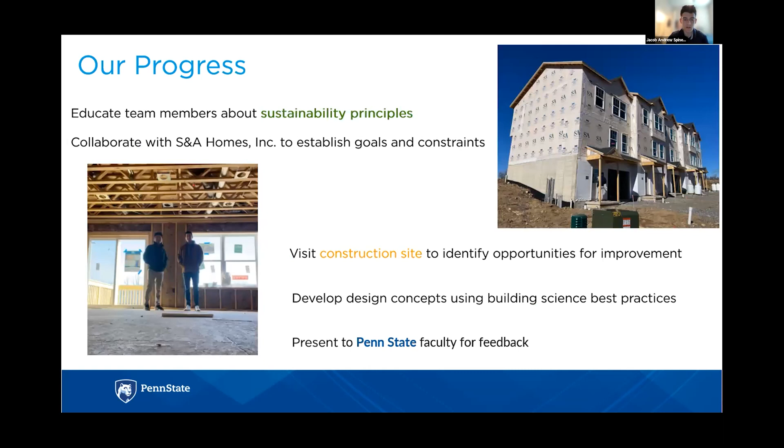Now let's take a look at some highlights of the architectural changes. For the architecture team, we were interested in looking at the existing townhomes and seeing how we could make changes to create more efficient living spaces, optimize circulation, and cluster plumbing. We wanted to keep the existing footprint of the building, but change the interior.

On the first floor, we wanted to reconfigure the kitchen to allow for more solar gain throughout the space, as well as move the stairs down 2 feet to incorporate a mechanical chase. We also clustered plumbing in a wet wall on the left side of the plan.

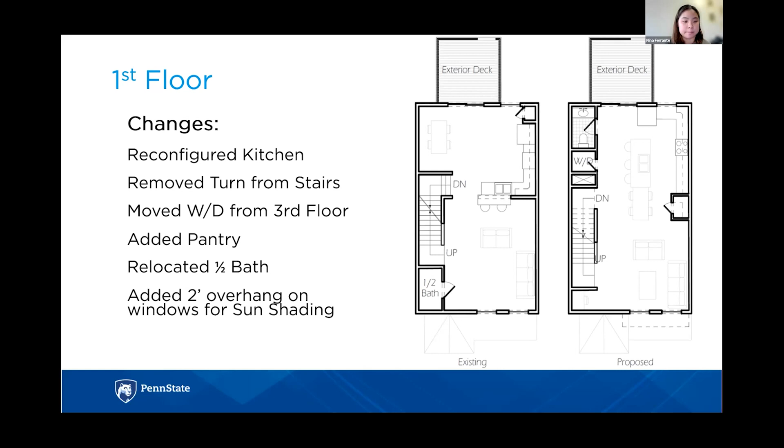Throughout the project, we extended the roof overhang 2 feet to shade the south facade.

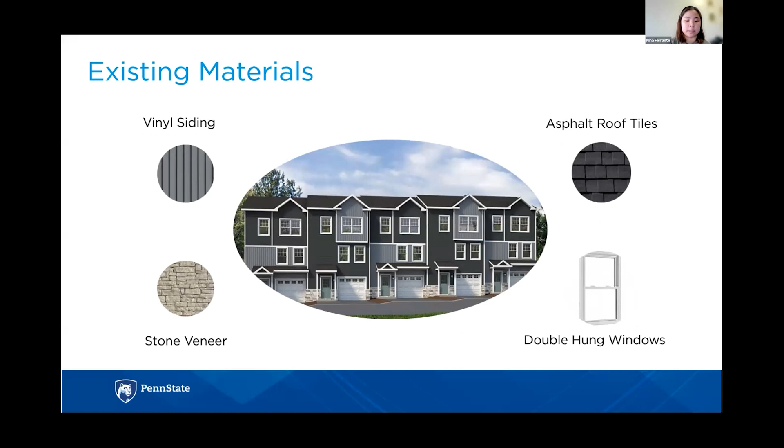For the existing siding, we saw that they used vinyl siding as well as stone veneer and asphalt roof tiles, and our main goal was to lower the embodied carbon by choosing new materials that were locally sourced. For our proposal, we currently have concrete roof tiles, Shou Sugi Ban siding, as well as a different stone veneer, and we were able to find local manufacturers for all of these options.

By using a fly ash mix, concrete shingles, and wood siding, we were able to reduce the embodied carbon of our building. However, embodied carbon is something that we plan to explore more as we finish up this project.

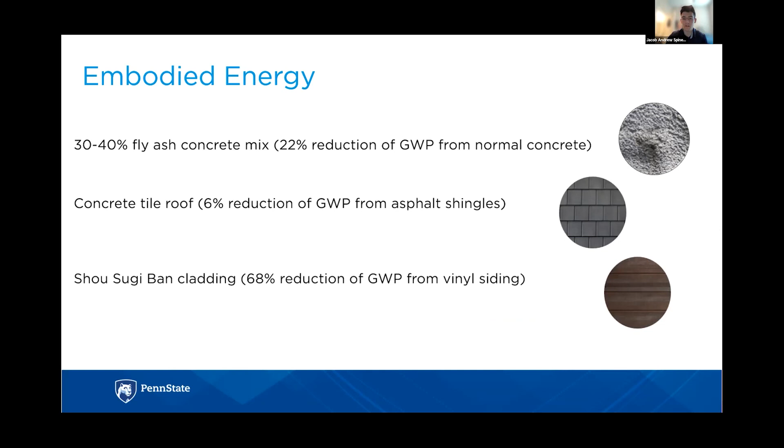Next, we will explore some of the enclosure and mechanical design that allowed us to reduce the site EUI to 6.03 kilowatt hours per square foot per year. Before we do, we would like to share that these decisions were largely made based on cost optimization using BEopt and using PHIUS recommendations for enclosures.

Our first point of focus was air sealing, since S&A expressed to us that this would be one of their biggest challenges moving forward. In these pictures from the site, we can see holes and tears in the primary air barrier as well as tape peeling off of the seams. These are accounted for in our design by using zip R sheathing, which will be shown later.

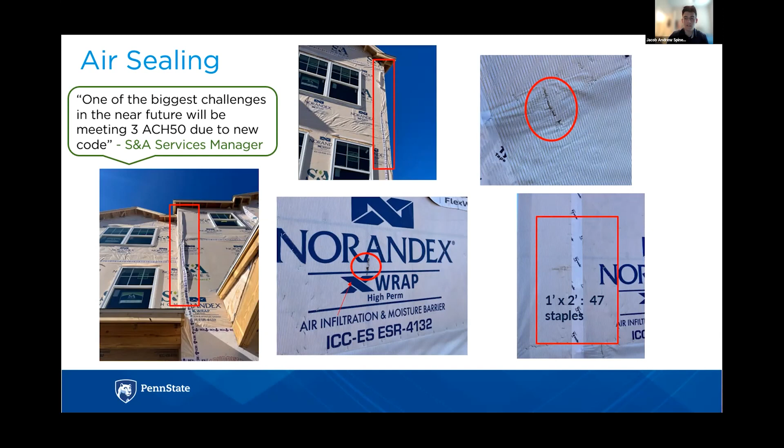An S&A project manager shared that one of the leakiest areas in these units is the demising wall due to penetrations in the interior drywall. We chose to change their design from a single 2-hour firewall with dense glass to 2 1-hour firewalls, as this was recently allowed by a code change. The interior fire sheathing layers are taped and act as air barriers, so an unlimited number of penetrations can be made in the drywall without affecting the air barrier.

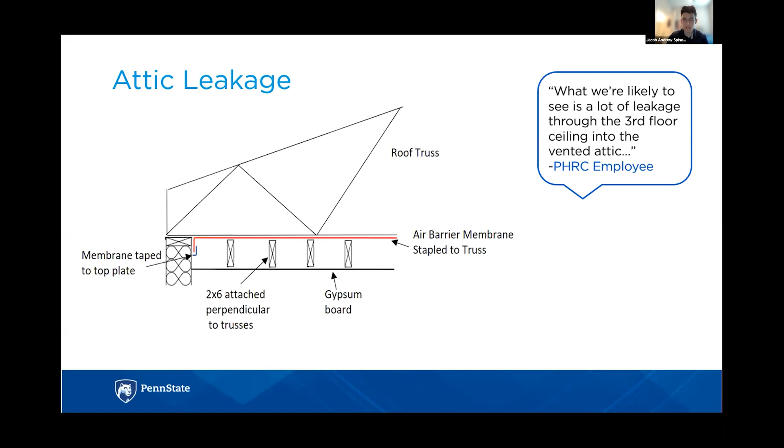A Pennsylvania Housing Research Center employee pointed out that another likely source of air leakage is the ceiling below the roof trusses. To solve this, our design has an air barrier stapled to the trusses and taped to the third floor top plate. 2x6s are then used to make space for utilities, and the gypsum is attached to the underside of the 2x6s. Next, we will explore thermal control.

The insulation in the Solar Chase units exceeds 2021 IECC in all aspects and ensures durability of the envelope by mitigating condensation risk.

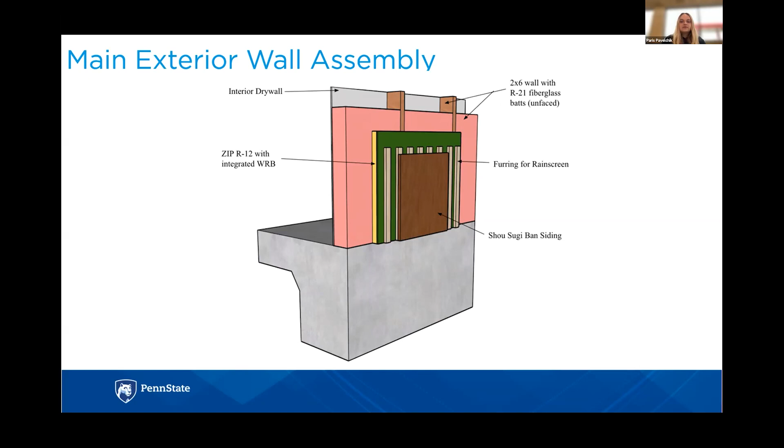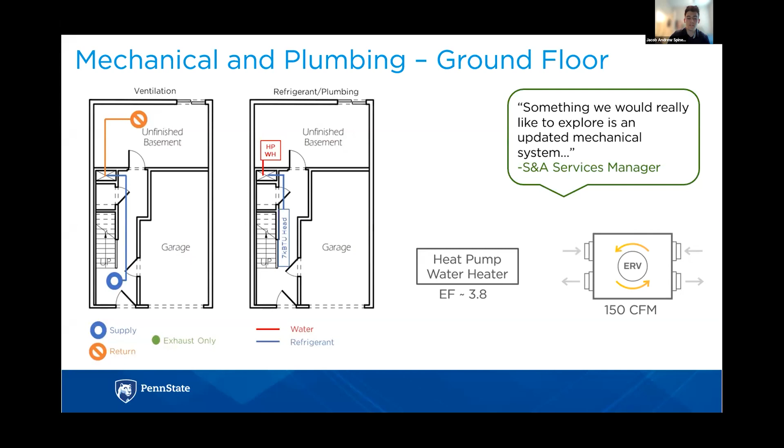Our design partner also expressed their desire for updated mechanical systems in the new units. For this reason, our design includes a heat pump water heater and an ERV for energy recuperation, sized using Indoor Air Plus standards. The units also feature a 2-ton ductless mini split system with an energy factor above 3 in most cases, and with these systems, the units are now 100% electric.

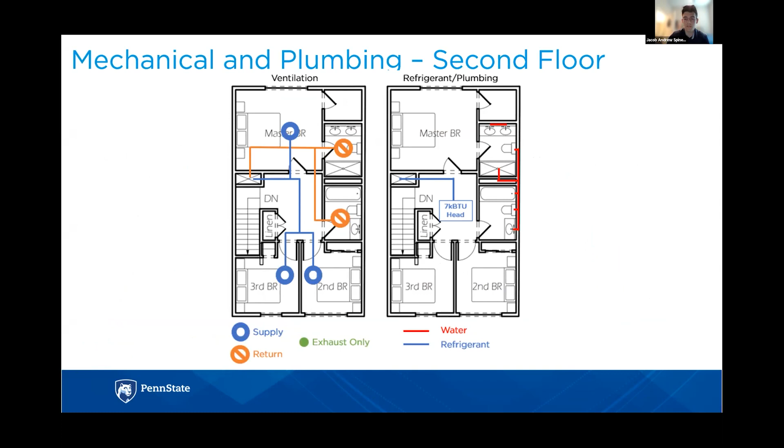Our design has at least one ERV supply and return, as well as a mini split head on each floor. We also prioritize clustering water fixtures to reduce the amount of water wasted when waiting for hot water.

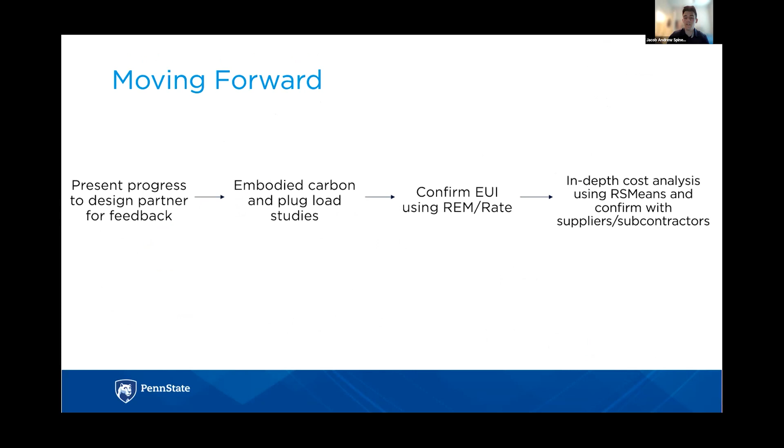As we finish up this project, our plan is to present this progress to our design partner for feedback, then conduct embodied carbon and plug load studies. Next, we will confirm our energy predictions using REM/Rate and perform an in-depth cost analysis using RSMeans and through conversations with suppliers and subcontractors.

So as you can see, upon completion, Solar Chase will be a replicable net zero home that prioritizes high efficiency and occupant comfort for an appropriate price. Thank you.